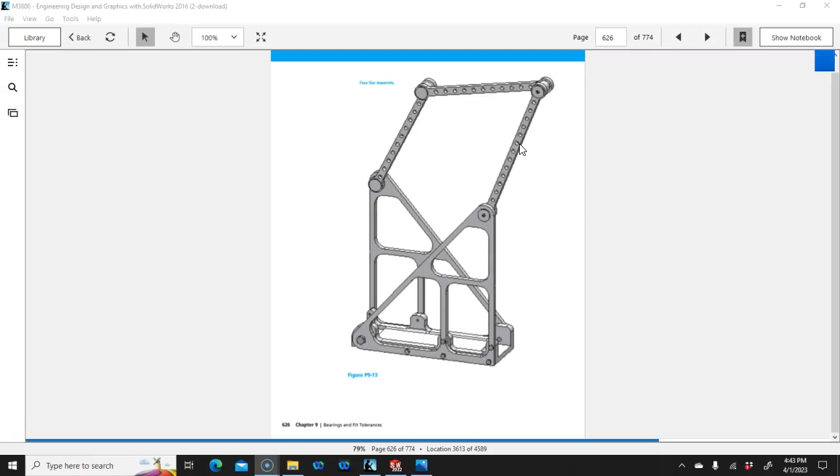So this is an assembly with 2 pieces. Maybe not as complicated as the wheel looking wise, but it's still got a fair amount of noise to deal with. Pretty much we have one base, two frames, the links. So it's not that there's a lot of parts or a lot of complexity, but you have to kind of organize your thoughts and your strategies for getting into this.

They did give us some names, so we will try to follow those. And we have the bill of materials with the assembly and balloon callouts. The Toolbox library is we have hex bolts, so the H bolt 1/2 inch 13, 1 1/4 inch length, fully threaded. And if the second number, pretty sure it's the second number anyway, was 1 inch, then there would be a 1/4 inch of shoulder to 1 inch of thread, so partially threaded. 1/4 20 by 1 inch fully threaded, 1/4 20 by 1 1/4 fully threaded, and then links.

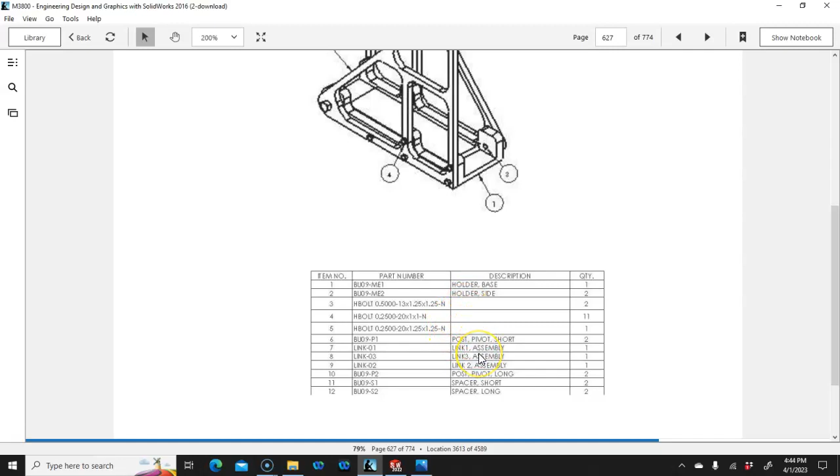And let's see, where are they? They do call out for the bearings, but I'm not seeing those in this group. All right, so this drawing doesn't quite fit, so I grabbed a screenshot. And I have a little bit of heartache over this use of the section views when a front view and a top view would have done the same thing, and you could have labeled them front view, top view. With putting them on another page and the continuity between the sheets, yeah, I kind of get it. I don't know that it adds

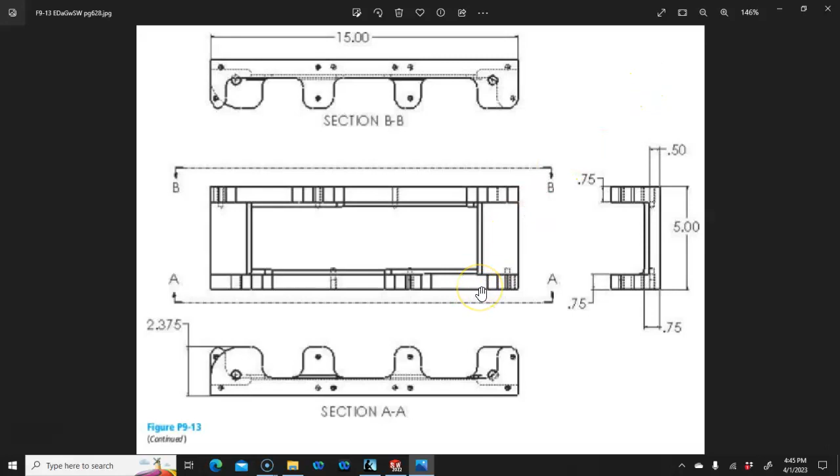clarity. This is also one of the pieces that when we do the optional manufacturing review I want to beat up pretty good. So there are some geometries to take note of, and so we go over to the next one. And I believe it broke these into the section AA, so you have the hole locations, and then you have the geometry dimensions. And then the next segment is for the section BB, pretty much looking at it from the same size and same side. And with it being upside down, again, there's a little bit of a clarity issue.

So we've looked at the tech drawing list of do's and don'ts from, I believe it's chapter 5, and really anything that improves readability, or we can just make it not so busy. Breaking this into 2, contour dimensions, hole pattern, I get the intent. I just think from a working drawing perspective, it makes it more busy and less clear.

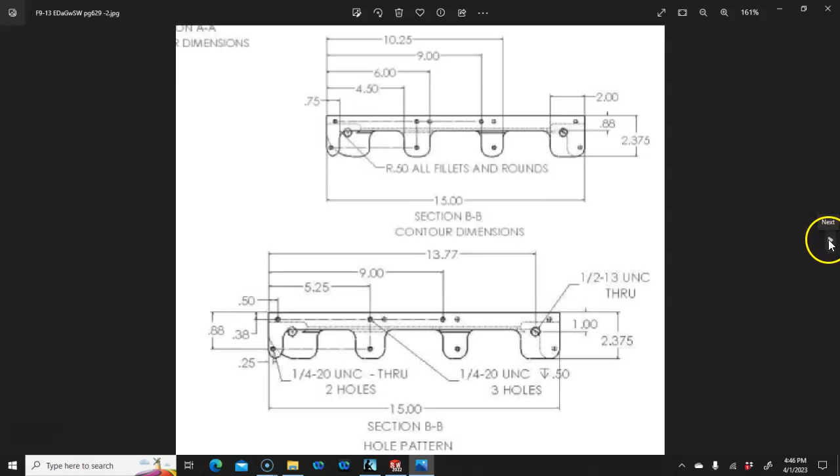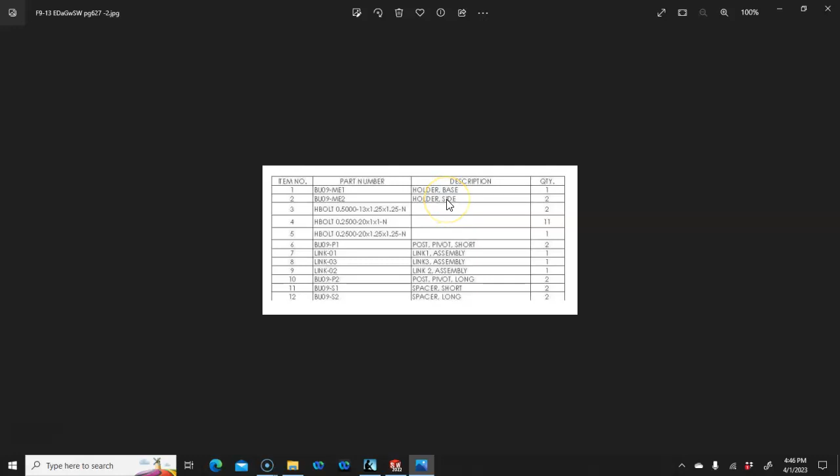All right, so the frames, let's see, the holder side, so 15 and 13, want to look at the other one. Well, let's see, there should have been a quantity of 2, so let's double check that. So I was assuming that those are the same, but there's a holder base and a holder side. Quantity 2, so yeah. So we pretty much have to build one of these, and we'll take a look at those geometries.

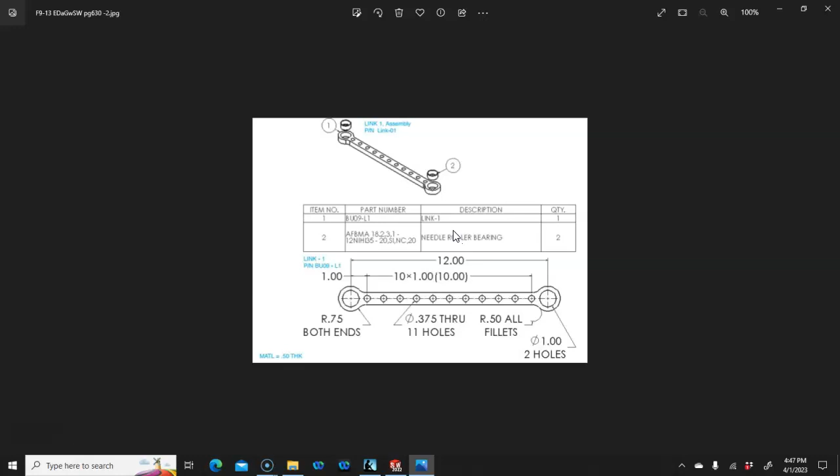So here's the callouts for the needle bearing. We'll need to double check the library. But then the other side of this is we'll have to go to a supplier, McMaster, Grainger, whatever is available in your area, and take a look at the needle roller bearing with those specifications and check the availability and make sure that we're putting a part that is readily accessible, that I can place an order and tomorrow or sometime this week a box will show up with my bearings in it.

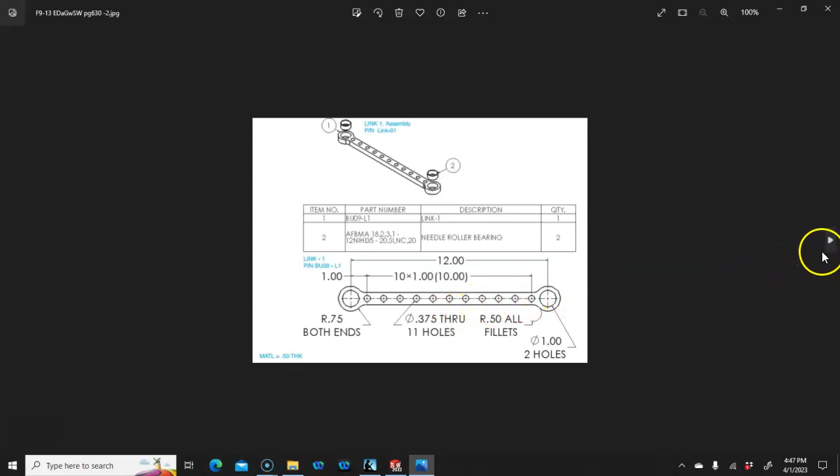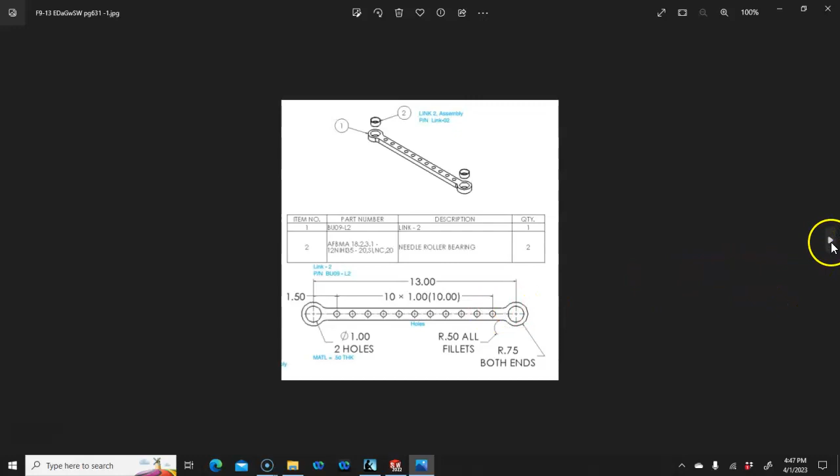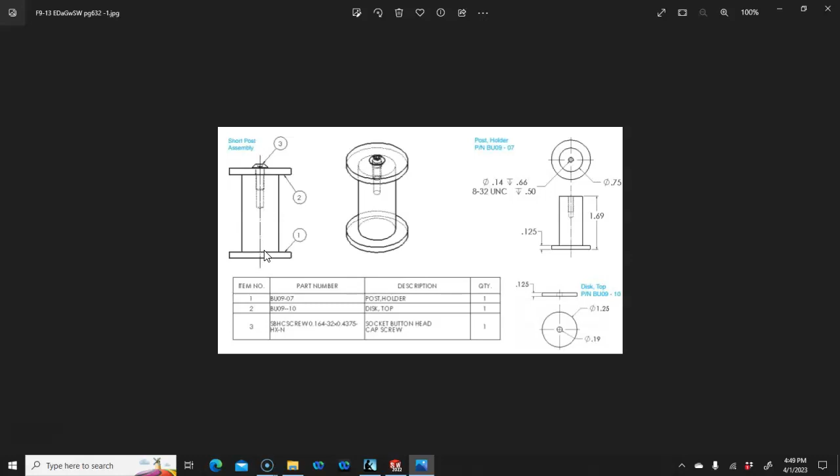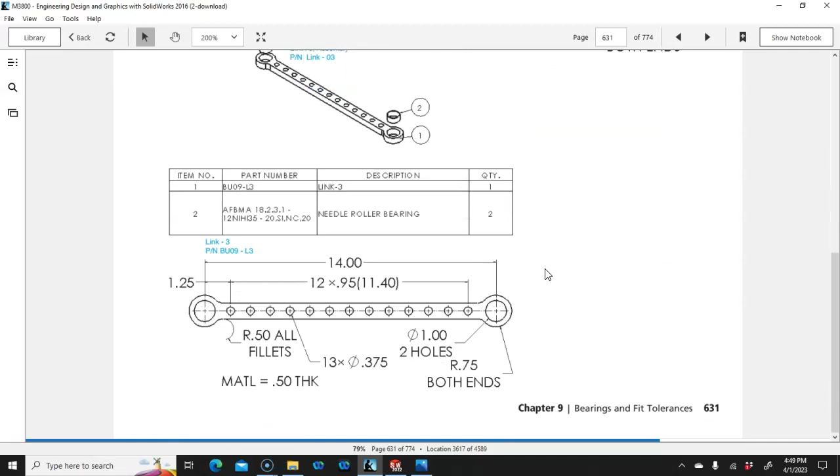The one issue that I could potentially see with it is, as this turns, if it catches the one side, depending on the rotation, it's going to try to unthread. So it would need a lock washer. We'd have to check the clearances, reduce the amount of bind, look at the side loading. I mean, there's a lot of, I want to say, small issues there, but I think even if it came down to doing an extra pin versus removing all that material to have an anti-rotation device, I could probably justify that. But we're going to build it as is and make some determinations as we go.

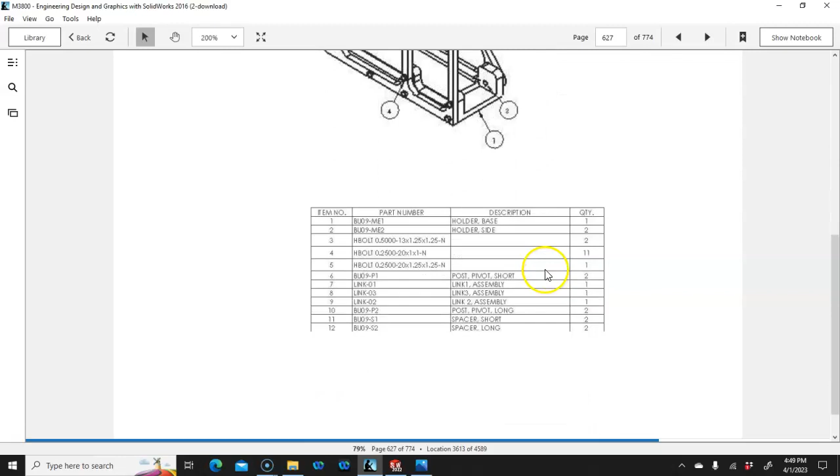I don't see anything jumping out too complicated. We're going to use the hole wizard, and we'll also take a look at what would happen if we needed to download a fastener from McMaster again, or getting the geometry. So let's go ahead and get into the modeling and see what comes out of this project.